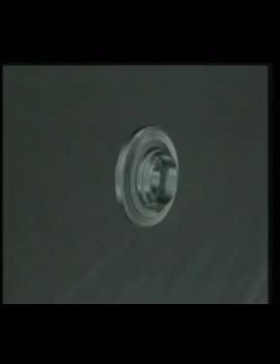Overcoming friction has challenged man ever since he invented the wheel. Friction occurs between contacting surfaces that are in relative motion. If the loads and relative movement increase sufficiently, without lubrication the surfaces will fuse together and seize up. The main purpose of lubrication is to provide a separating film to prevent this happening.

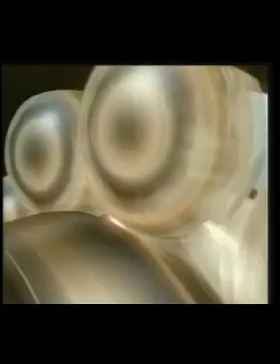For almost a century, SKF have been involved in the reduction of friction and wear by the development and manufacture of a range of rolling bearings and lubricants. Rolling bearings can carry very heavy loads at extremely high speeds, and it's essential to have a film of lubricant between the surfaces. Mineral oil is generally used to create the very thin oil film, which is between 1/10 of a micron and up to 1 micron.

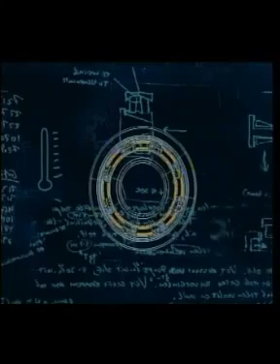Very smooth surfaces and clean conditions are required to prevent the film being penetrated and wear started. To achieve an adequate oil film thickness within the bearing, a number of variables must be considered. The most important is the viscosity of the oil, which influences the film thickness. This is specified as centistoke, or millimeters squared per second.

As viscosity changes with temperature, this is usually quoted at a reference temperature of 40 degrees centigrade. Viscosities used for bearing lubrication range from 2 centistoke, which is very fluid like water, up to 500 centistoke, which is comparable to syrup.

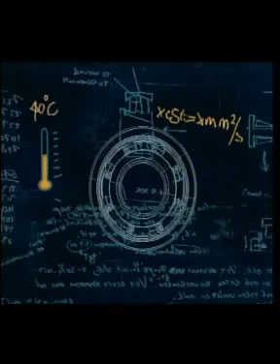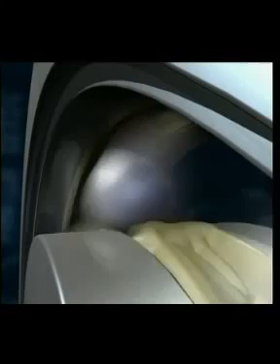The operating speed has an important effect on the lubrication film thickness. As the speed increases, a condition known as hydrodynamic lubrication develops, which significantly increases the oil film thickness. The effect is similar to aquaplaning. At slower speeds, higher viscosity oils are required to maintain an adequate oil film. In very slow and heavily loaded applications, additives to improve lubrication are required.

Temperature within the bearing must be considered. The oil viscosity will reduce with increase in temperature, with a corresponding reduction in oil film. Oils with a high viscosity index limit the effect of temperature changes within the bearing. The operating load has to be considered, as this has a direct effect on the contact of raceways and rolling elements. Grease is a combination of approximately 85% mineral oil and 15% soap or thickener.

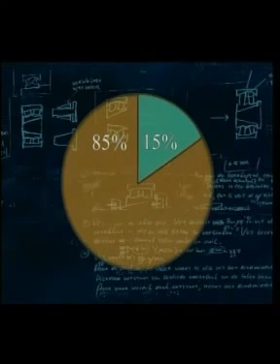The 3 main soaps or thickeners are lithium, a good all-round grease with a wide temperature range; calcium, which is recommended for installations exposed to water but has a 60 degrees centigrade maximum temperature; and sodium, which has good sealing properties but should not be used in wet applications.

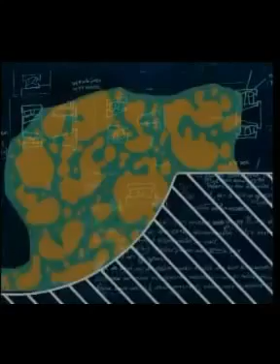All the soaps function in the same way. They retain the oil in a similar manner to a sponge retaining water. The oil is allowed to bleed out as the bearing requires it. Greases are measured by their stiffness or consistency. This, like the oil viscosity, can change with temperature. For bearing use, the normal range of grease consistency is between 1 and 3, with 3 being the stiffest.

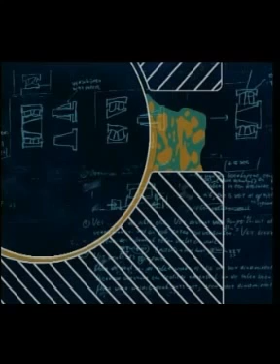Grease is by far the most popular method for bearing lubrication. It's easy to apply and retain within the bearing housing and can also function as a seal to protect the bearing. The bearing should be filled with grease and the free space in the housing up to 50%. This is to allow room for the excess grease to be ejected from the bearing during startup. In slow speed conditions where there's no overheating, a complete fill is desirable.

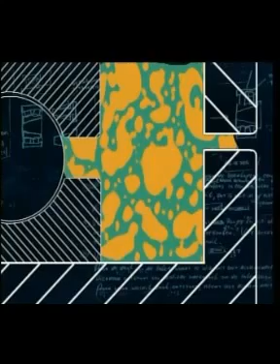Oil lubrication is a very effective way to lubricate bearings but can present difficulties with sealing. There are several methods which are used, the static oil bath being the most common. The oil level in this instance should be halfway up the lowest rolling element.

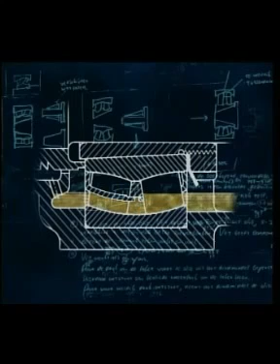In most gearbox applications, the bearings are lubricated by oil splash. On critical machinery, such as very large gearboxes or the drying sections of paper-making machines, heat and contamination can be a problem. In such applications, a recirculatory system is used. Oil is fed by pump to the bearings, then allowed to drain back to a sump, where it can be cooled and filtered before reuse.

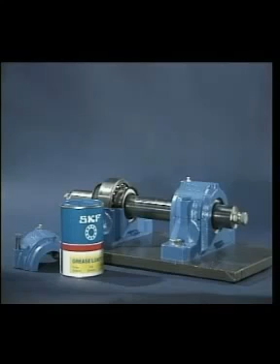With replacement bearings, it's essential to make sure that the bearing is completely full and the housing partially full of the correct grade of clean grease. Make sure the grease, like the bearing, is kept protected at all times.

In applications where the operating conditions are hot and where the environment is harsh, it may be necessary to re-grease the bearings. In these cases, provision must be made for the excess grease to escape from the housing. Regreasing should be done whilst the equipment is still rotating.

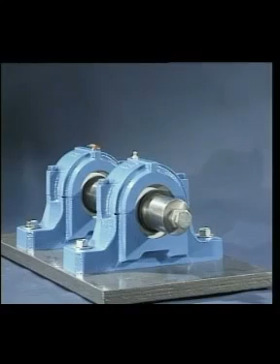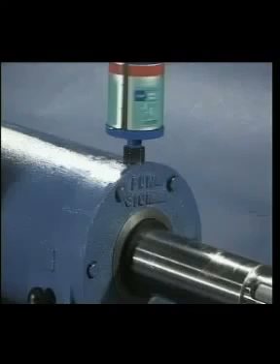In some applications, continuous lubrication is preferred. This can be achieved by a centralised system or by the use of an automatic lubricator. Ensure that the lubrication fitting is clean, that the right type of lubricant is used, and that the correct quantity of lubricant supply is set.

Sealed and shielded bearings are greased for life and should not be interfered with.